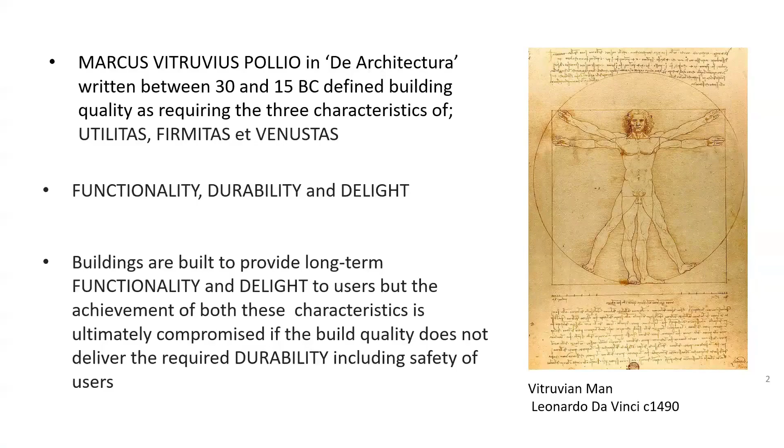Many of you will have heard of Vitruvius, who in the 1st century BC defined quality in architecture as requiring the three characteristics of utilitas, firmitas, et venustas, or functionality, durability, and delight. However, if what we build is not durable, users' buildings can only have limited availability of the functionality and delight that may be offered by a building. And additionally, user safety may be significantly compromised as a result of a lack of durability, which I will show in the following sections of this presentation.

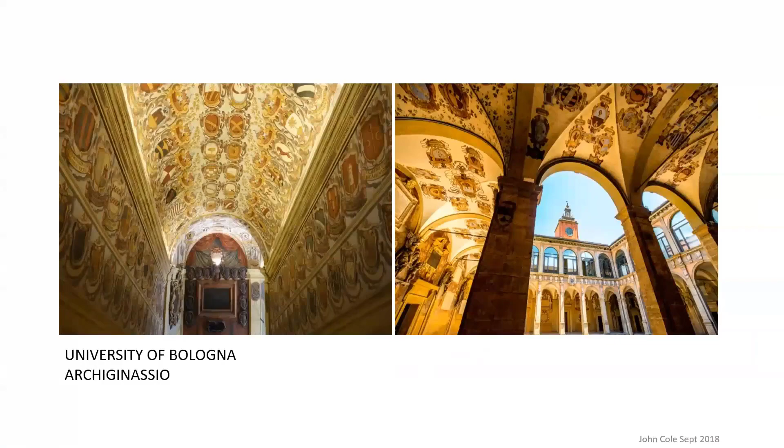As an introduction, I've taken university buildings as an example of a building typology, which has over many centuries provided some excellent examples where durability was built in as a result of using the best architects, the best designers, the best materials, and the best tradesmen. The durability with which, for example, the Archiginnasio in Bologna was built in 1563 is still enabling users of that wonderful building, part of the oldest university in Europe, to both benefit from its functionality and to delight in its beauty. It contains wonderful spaces maintained in first-class condition, and with the walls and ceilings of the corridors festooned with the coats of arms of students of the university who over the centuries came to Bologna University from all parts of Europe.

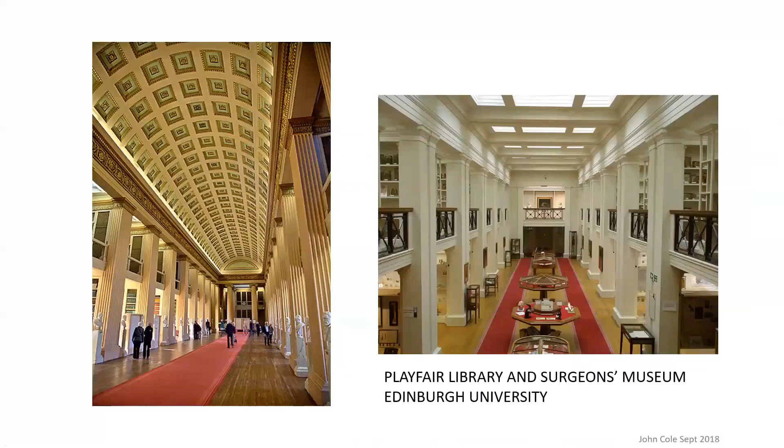And here the Old College, Edinburgh, from a design by Robert Adam, still serving thousands of students and attracting sightseers from around the world. A highly valued part of the heritage and fabric of the city, and still as durable as when it was built. The slightly later library and Surgeons Museum at this university in Edinburgh are wonderful pieces of interior architecture, still bringing immense pleasure to users.

And just for completeness, as we are based in Belfast today, two institutions north and south of the Irish border, Trinity College Dublin and Queen's University Belfast, provide high quality open spaces serving the communities that they sit in. Interestingly, both these were designed by the Northern Ireland architect Charles Lanyon.

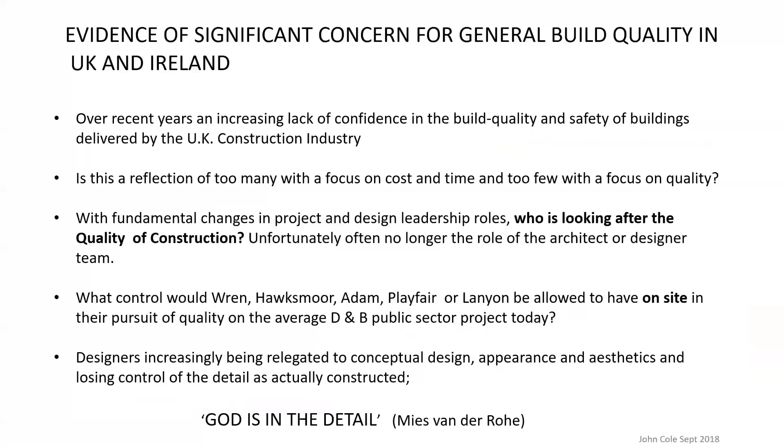Designers, unfortunately, appear to be increasingly relegated to conceptual design, appearance, and aesthetics, and they are losing control of the detail as actually constructed on site. It was Mies van der Rohe who said, "God is in the detail," and unfortunately, the design team seem to be getting separated from that.

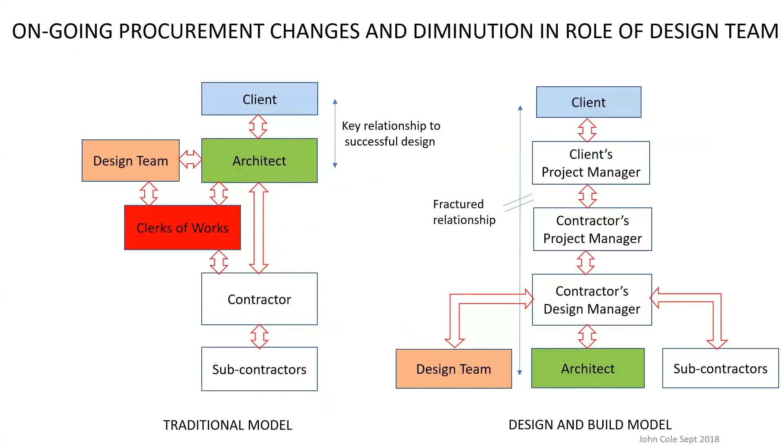Increasingly, the model on the right-hand side of this diagram tends to reflect the approach now being taken, which has created a significant distance between the client and the architect, particularly during the period on site. And the role of the clerk of works as a key advisor and the eyes and ears of the design team, has also been greatly reduced, so that we're relying more and more on contractors signing off their own work. And unfortunately, as is about to be shown, that is not proving to be successful.

The first of the inquiries I undertook followed the collapse in January 2016 at 8 o'clock in the morning of 9 tons of brick masonry onto a playground in an Edinburgh school. An hour later, a class of nursery children would have been queuing against this wall to go into the school.

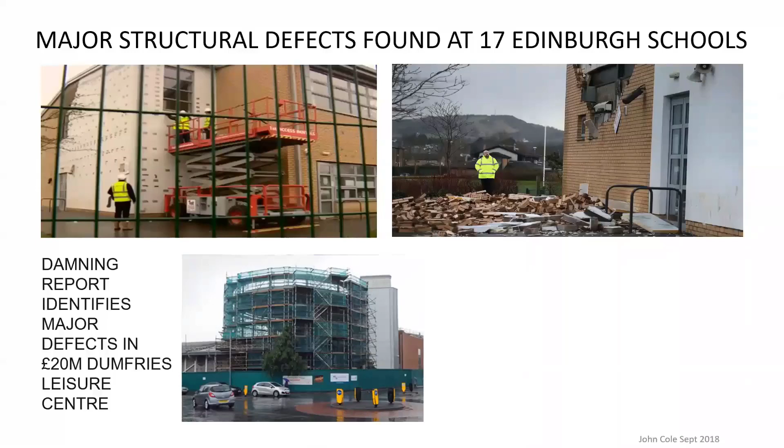The second inquiry was in relation to a major events and leisure centre in Dumfries, which had to be closed after only 6 years in operation, and recently looked like this, as opposed to what was originally built to look like, due to the fact that it had to be demolished as a result of the discovery of the same structural defects as found in the Edinburgh schools.

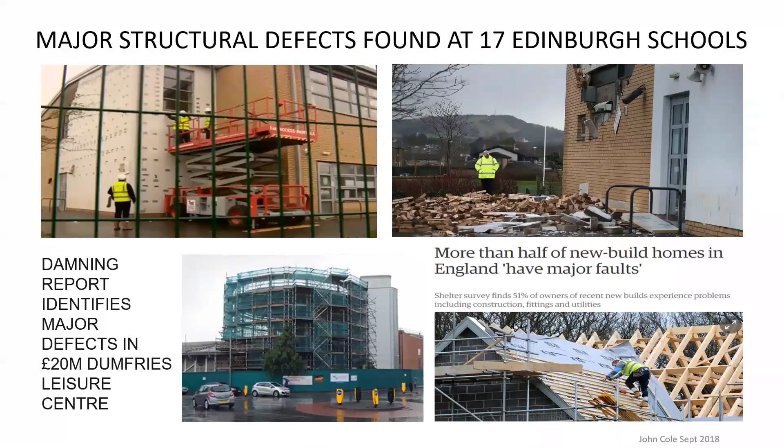But these problems are by no means confined to Scotland. Large national contractors were responsible for the buildings of both inquiries. This third headline reports the outcome of a survey by Shelter that suggests that more than half of new homes in England have major building faults.

The Edinburgh inquiry, which reported in February 2017, recommended that risk-based assessments of all buildings of a similar vintage and construction be undertaken to determine if the same defects were present. This BBC headline from April 2017 reports that almost immediately 72 schools were found to have the same range of defects in the construction of their external walls. Currently, I believe that number significantly exceeds 100 or 150 school buildings, with regular discoveries still being reported.

My inquiry report was clear that these masonry defects could not be viewed as a characteristic of only school buildings, but based on the evidence given to the inquiry, would likely be systemic within the industry. This quickly was proven to be the case, with large numbers of examples emerging in both public sectors, such as in the health sector, as shown by the headlines above, which refers to 51 health buildings in Scotland, and in private sector projects across Scotland.

In addition to the widespread failures in the masonry panels discovered in the Edinburgh schools, my inquiry identified widespread failures in the application of fire stopping throughout the 17 schools. Inadequacies in the incorporation of this life safety related factor have been known about for many years within the industry, and yet have been largely ignored, leaving the basis for fire protection of building occupants in many recently completed buildings majorly compromised.

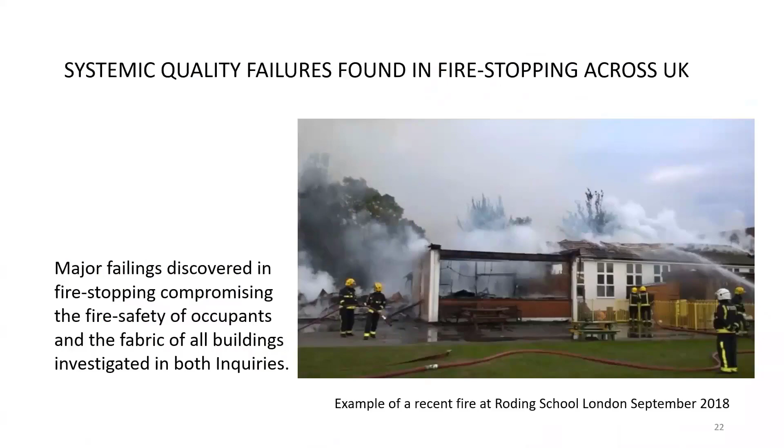Fires in school buildings are unfortunately too common. This fire in the picture here occurred just last month, but as we know, unfortunately, recently fires are not confined to one type of building. These headlines from major national newspapers over the last 2 years indicate the extent of this problem, which both sides of the industry have largely still failed to address. This headline refers to 8 schools in Manchester built under the Private Finance Initiative.

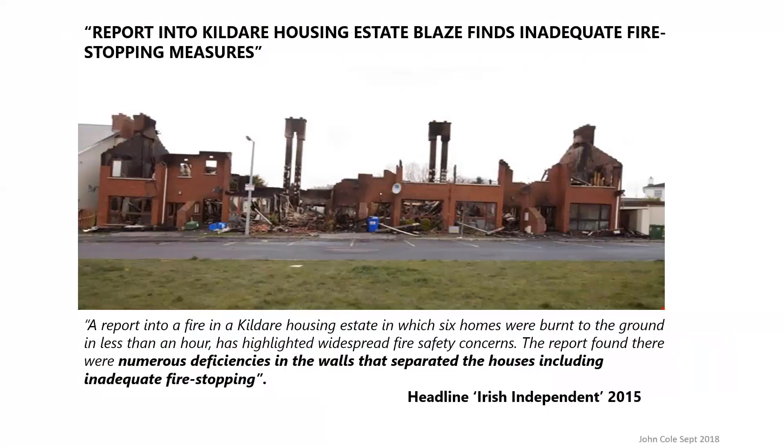This photograph shows the remains of a block of houses in Kildare, Ireland, which in 2015 were destroyed in less than an hour due to inadequate fire compartmentation between the houses and the roof spaces. Major failings have also been reported in fire compartmentation in many of the new hospitals recently built, requiring millions to be spent on retrofitting to provide a safe environment for patients. Again, all of these examples were built under PFI and used design and build procurement models.

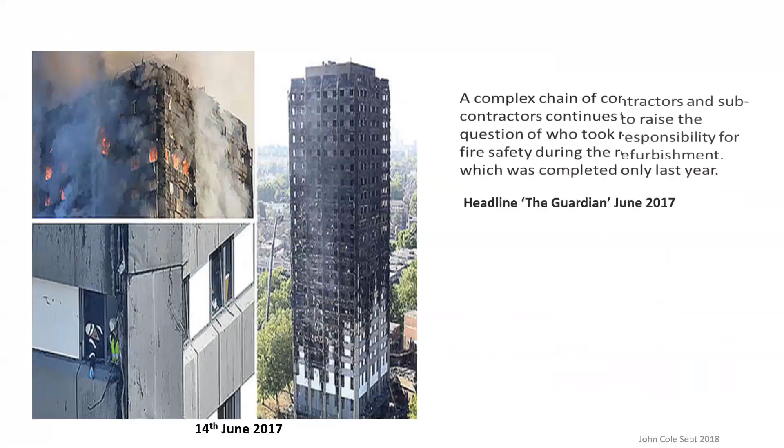And then in June 2017, this terrible tragedy occurred. It was procured using design and build. So the question again asked in our current procurement models: who, if anybody, is looking after the quality?

I will now look in more detail at one of the two principal building failures identified in the Edinburgh Schools inquiry, defective masonry construction. If any of us thought that this was a problem only for mainland UK, then headlines only yesterday in the main Irish newspapers would have brought a greater realisation of the likelihood that the systemic nature of these failings also affects the island of Ireland.

Both fire safety and structural defects were apparently identified in a significant number of schools recently built in Ireland. Initial reports indicate that the structural defects relate to the lack of adequate wall ties and the fixing of masonry panels back to the structural frame. This would be virtually a repetition of the defects discovered as part of the Edinburgh Schools inquiry in 2016. One technical report suggested an 80% risk of wall collapse in storm winds in a North Dublin school.

The Edinburgh inquiry itself was completed. The report I completed in February 2017 was published, and it is available on the internet for those of you who wish to refer to it. Just to give a background to the events leading to the inquiry, in January 2016, gable walls collapsed at Oxgangs primary school during a period of high winds. The initial inspections considered it as a one-off event, probably due to lack of embedment of wall ties.

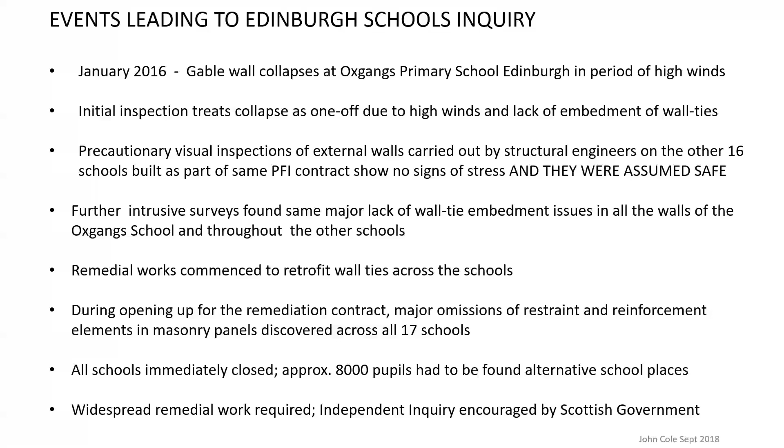During opening up for this remediation contract, major omissions of restraint and reinforcement elements in masonry panels were discovered across all 17 schools, raising more serious questions about the structural integrity of the buildings. All of these schools were immediately closed, and over a weekend, approximately 8,000 pupils had to be found alternative accommodation in schools around Edinburgh. Widespread remedial work was required, and an independent inquiry was encouraged by the Scottish Government.

In May, the City of Edinburgh Council agreed to commission an inquiry and asked me to chair that inquiry. I in turn appointed Stuart McCartney, a structural engineer, and Chris Phillips, a solicitor, to sit on the inquiry panel with myself. The report, as I've said before, was published in February 2017 with 40 recommendations. Some of these have already been implemented by the Scottish Government, and all the public bodies in Scotland have been required to report as to how they are addressing all of the recommendations.

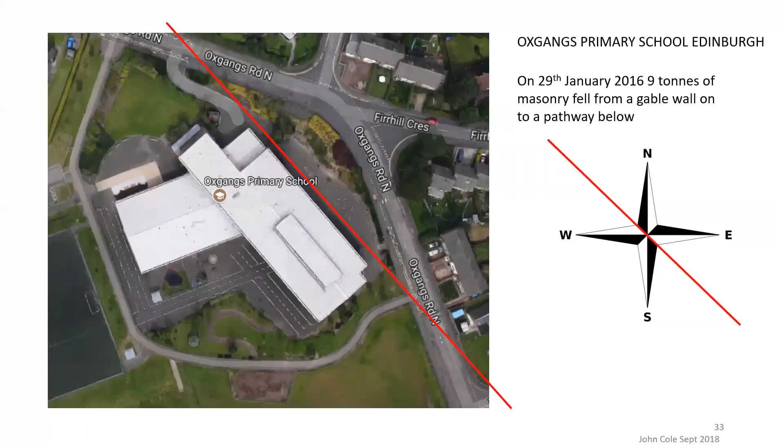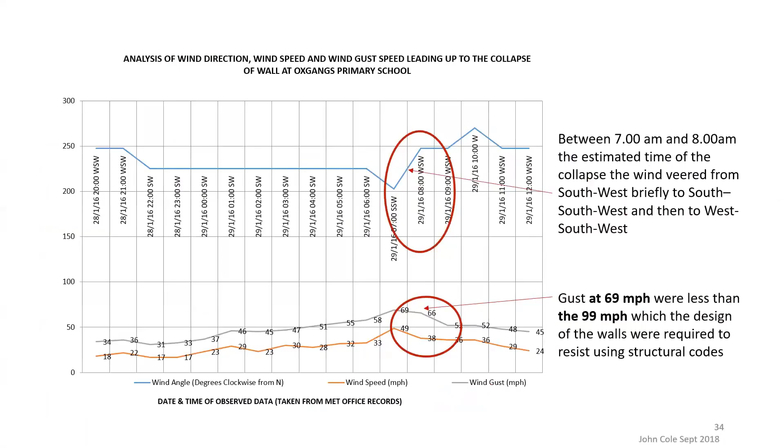I'll now go into some of the detail of the collapse. On the 29th of January, as I said before, 9 tons of masonry fell onto the pathway below. This photograph shows the layout and orientation of the school. As you'll see from this chart, the top layer shows the direction of the wind during the storm, and you'll see just around 8 o'clock the wind veered from southwest briefly to south-southwest and then again to west-southwest. At the same time, it gusted up to a speed of 69 miles per hour, still well within the 99 miles per hour which the design code required the wall to be able to resist.

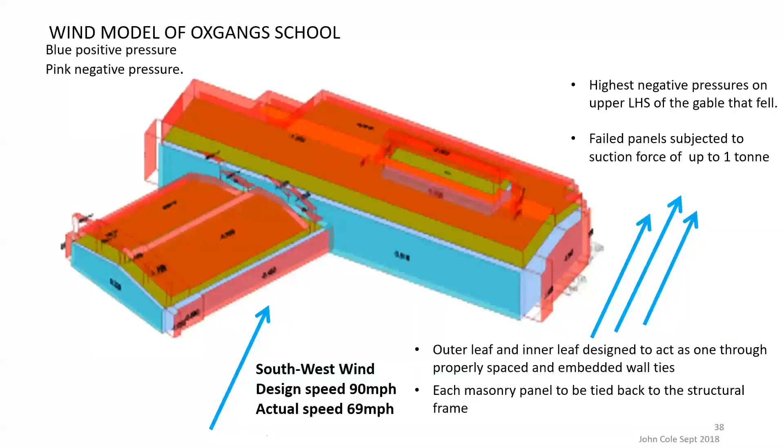So you can see the wind changing direction, and as it veers in this direction, it leads to suction on that gable wall, and the gable wall collapses onto the area immediately outside. This diagram shows the pattern of the suction on that wall, and the failed panels on the left-hand side of the gable on the right were subjected to a suction force of up to 1 ton. The outer leaf and inner leaf were, of course, designed to act as one through the inclusion of properly spaced and embedded wall ties. And again, each of these wall panels was supposed to be tied back to the steel structural frame. In both cases, this failed to happen, and this was basically the reason for the collapse of the wall.

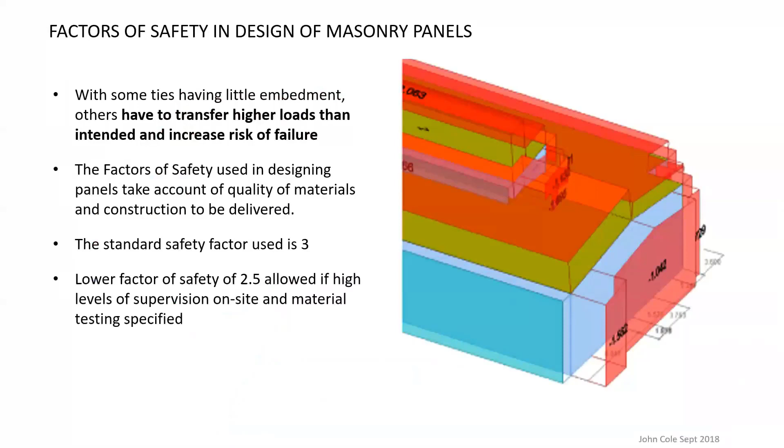Under the codes, there are different factors of safety allowed. The standard factor of safety required is 3, but that can be lowered to 2.5 if there is assurance as to a high level of supervision on site and rigorous material testing specified. The reduced safety factor was actually used by the designers of the building, and calculations undertaken by 2 firms of independent structural engineers showed that with the lower factor, these buildings would just pass, but if the standard factor of 3 had been used, they would actually have failed.

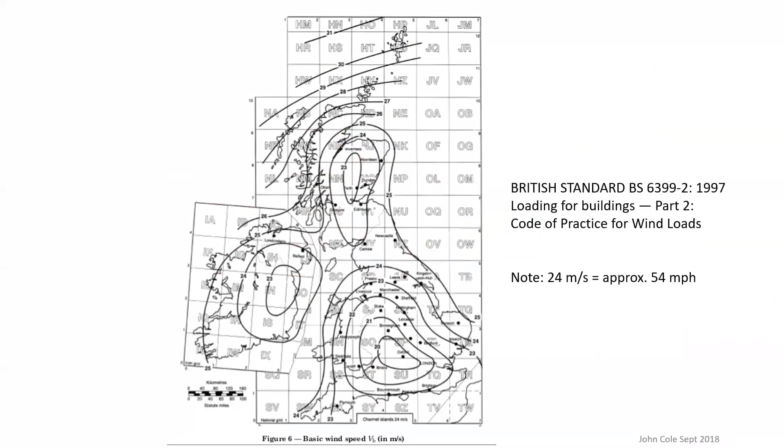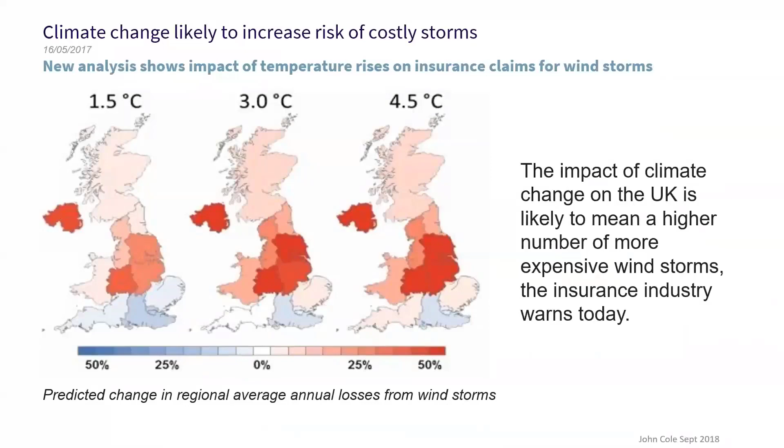The specification for the school in Edinburgh was pretty standard. It was a cavity wall with an internal block leaf of 140 mil, 120 cavity with a 70 mil insulation clipped to the inner leaf, and an outer face of brickwork or rendered blockwork. The wall ties specified were heavy duty 250 millimeter length Vista type wall ties, each required to have a minimum embedment of 50 mil, although if you read the manufacturer's instructions, they recommend a minimum embedment of 65.

Bed joint reinforcement was specified widely throughout the school buildings because of the size of panels involved and was required to give the structural stability needed. On the right hand side, the head restraints specified were a type with a sliding anchor, tying the wall in 2 places on the outside leaf and tying back to the inner leaf, all tied back to the structural frame.

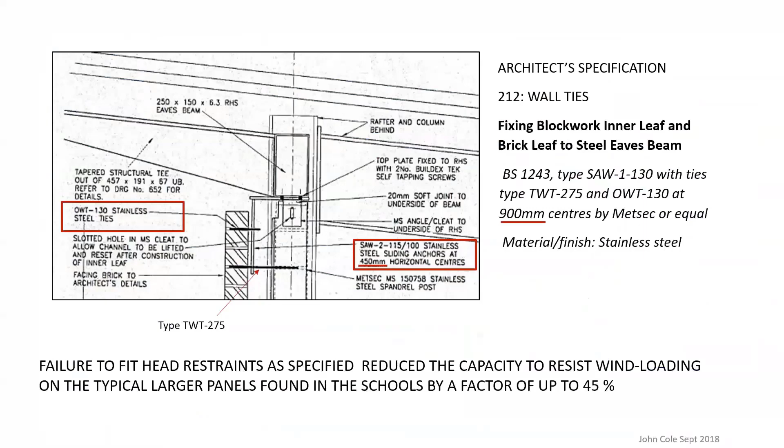This diagram actually shows something we found, that there was a differentiation between the architect specification, which showed that those head restraints should be fitted at 900 centres, whereas the engineering drawing showed 450. In fact, we find that they weren't fitted in most cases at all. Failure to fit the head restraints will actually lead to a reduction in the strength of the wall of up to 45%.

The other issue which came to the fore was that we were advised that the inner leaf of the wall was built first completely, and then the outer leaf was brought up afterwards. This is used to create a dry environment for trades to move in earlier than they would otherwise be able to do so. However, this was in conflict with the recommendations and the specifications, which required that the 2 leaves be brought up together with the leveling of courses. This was in fact pointed out by architects to the contractor for whom they were working, and was largely ignored.

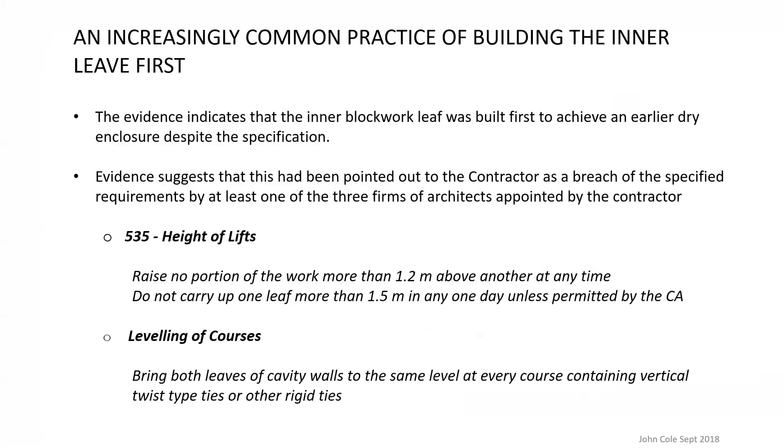There are many problems associated with building the inner leaf first, particularly in that you're relying on the grip and suction of the mortar to hold ties in place if you don't have an outer leaf on which to also rest the tie. As a result, bricklayers push the ties further into the inner leaf, leaving insufficient depth in the ties to give adequate embedment in the outer leaf. Alternatively, they may push the ties into the wet joints after building the brickwork. This simply causes a void and doesn't give the traction required on the wall ties.

Also, the inner leaf is generally built by people with less skills, as it is blockwork rather than the brickwork on the outside. And if it's built off the plumb, perhaps to follow the line of stanchions, then the outer leaf being built to plumb means that there's variation in the cavity width.

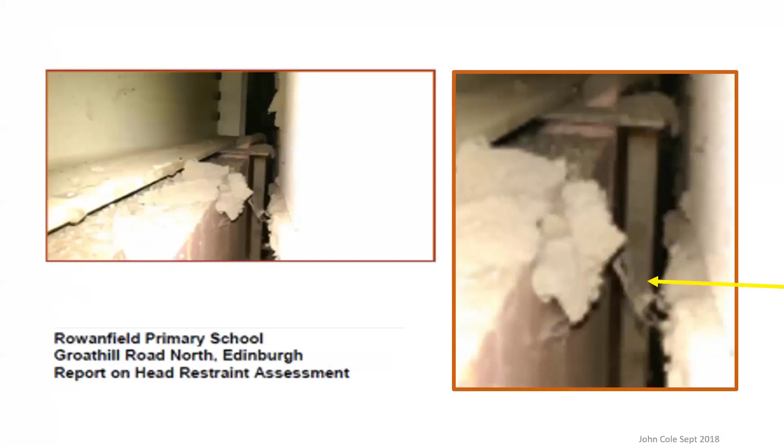This photograph shows one of the head restraints built into the cavity of the wall and being attached to a steel beam. But as you see in the close-up here, the wall ties, which are supposed to be on the sliding anchor, connecting the anchor to the inner and outer walls, have not been built in properly and are just hanging from the tie, so they're not fulfilling their purpose at all.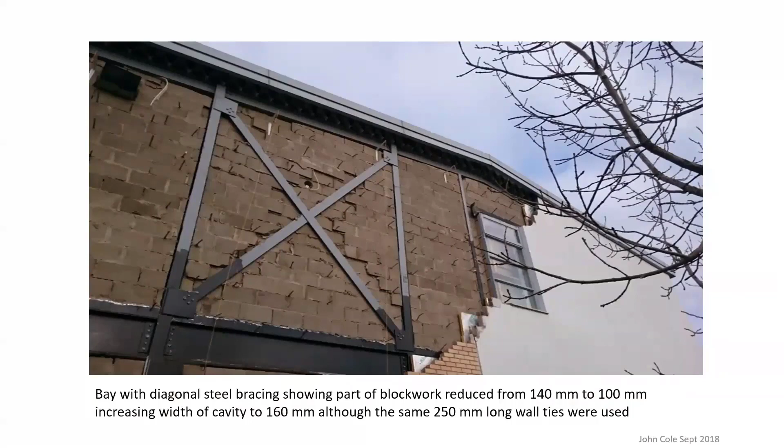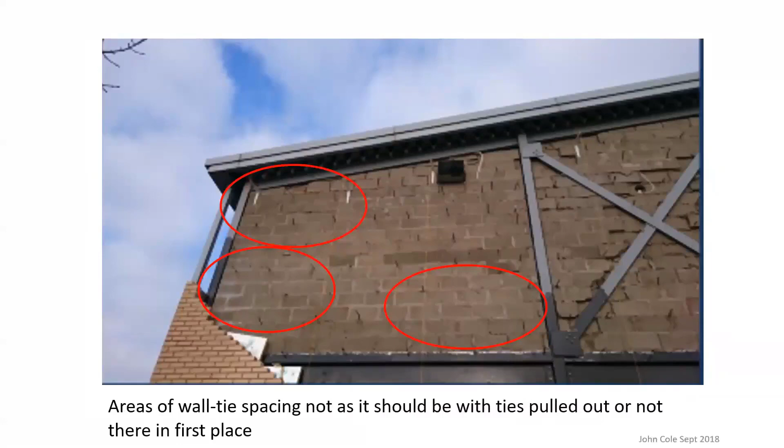However, in the adjacent bays, you can see that the ties were again over. The embedment was too much in the inner leaf, leaving little short areas standing out to connect onto the outer leaf when it was being built up later, and also areas where no ties were obvious at all. These are internal pictures of the walls of that school, and you can see the end of the tie just touching the inside or outer face in both these cases.

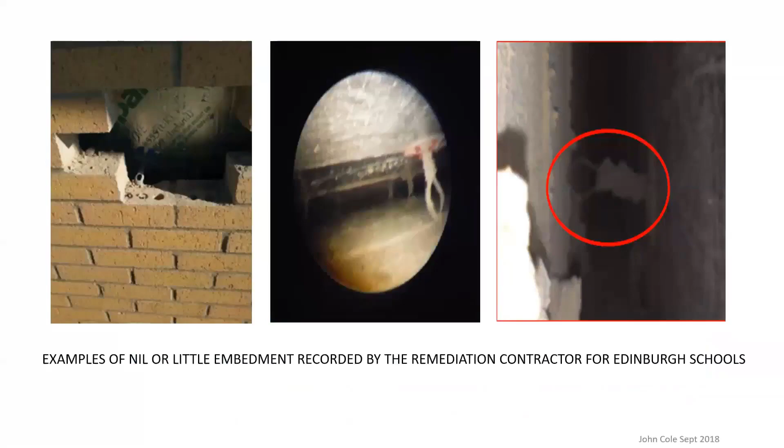And here's a different school in the same block of 17 schools, again using a slightly different wall tie, but again failing to reach the outer leaf or the inner leaf. And again, the same issue in different schools in the group. Virtually no effective embedment of wall ties into the outer leaf.

I'm going to very, very quickly go back to Vitruvius, who I mentioned at the start in relation to durability, in which he's comparing the work of Romans and his own workmen and Greeks. And the first one, he says, our workmen, in their hurry to finish, devote themselves only to the facing of the walls, setting them upright, but filling the space between with a lot of broken stones and mortar thrown in anyhow. This is 100 years BC.

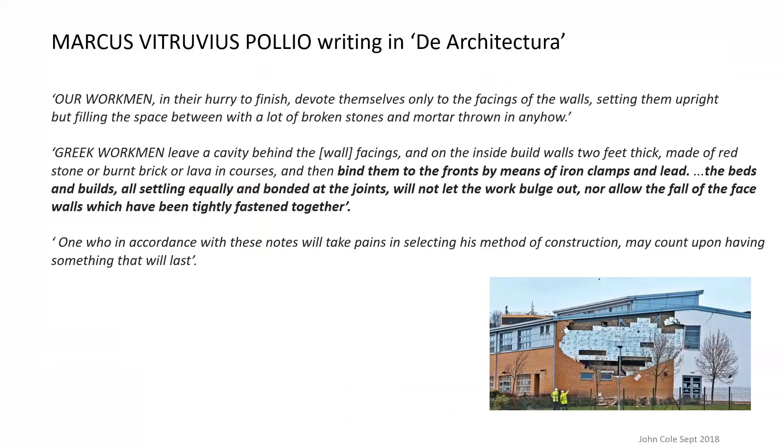He contrasts that with the Greek workmen who he had seen. They leave a cavity between the 2 walls and bind them to the fronts by means of iron clamps and lead. The beds and builds, all settled equally and bonded at the joints, will not let the work bulge out, nor allow the fall of the face walls, which have been tightly fastened together. One who, in accordance with these notes, will take pains in selecting his method of construction may count upon having something that will last.

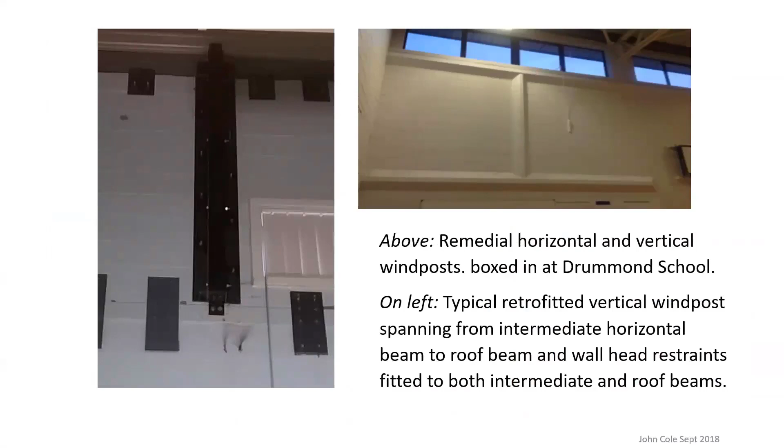It would appear that large parts of our construction industry in the 21st century seem to have forgotten this basic 1st century BC lesson. You can see here the retrofitted wind posts, both horizontal wind posts and vertical wind posts, and restraint plates tying the internal walls to the beams, intermediate beams, and the top beams to provide the required structural integrity. And you can see the impact that had on the building.

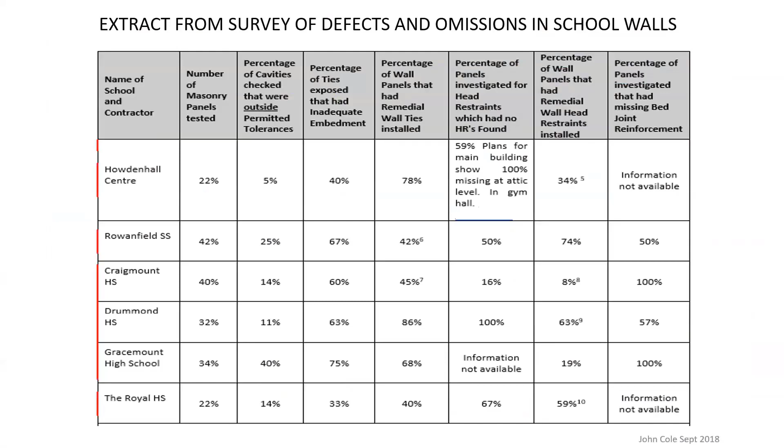I'm not going to go through this diagram in detail, other than to say that on the left-hand side you see just 6 of the 17 schools, and this records the amount of areas which had no bed joint reinforcement, which lacked head restraints, and which had inadequate embedment of wall ties or missing wall ties. And you'll see the numbers are all 60, 70, 80, 100%. This demonstrates major failing of quality across all of those aspects, across all of the schools.

So the issue really is about the quality assurance that we get from the industry. As I said before, we had 6 different contractors building 17 schools, each with an approved quality assurance system. The subcontractors used had similarly approved quality assurance systems. The firms of architects and the firm of structural engineers used in all projects had QA systems, as had the national firms who acted as independent testers. And additional to that, building control inspections were carried out.

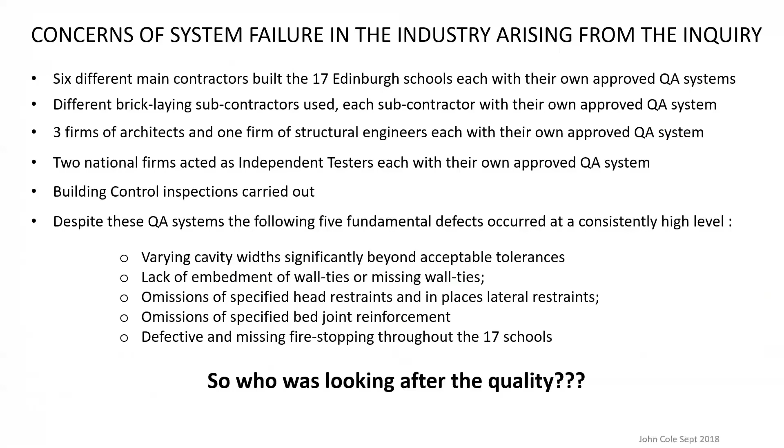Despite all of these quality assurance systems, which were paper-based, the following fundamental defects occurred at a consistently high level throughout all of the buildings: cavity width, lack of embedment, missing wall ties, missing head restraints, missing bed joint reinforcement, defective fire stopping, and missing fire stopping throughout the schools. So again, who was looking after the quality despite all of these quality assurance processes and systems?

The inquiry sought information from all Scottish local authorities, in addition to Edinburgh, and found that the same defects had been present in many schools from across all parts of Scotland. In the previous 4 years, there had been at least 5 collapses of external brick panels in recently built Scottish schools, the causes being virtually identical to that found in the incident in Edinburgh. There was no effective coordination of these issues as an industry-wide problem.

In February 2017, I concluded that similar defects were likely to be spread throughout the industry and recommended proactive risk-assessed investigations should be undertaken, and hundreds of buildings have subsequently been identified with those defects. As a result of this inquiry, I also found that clients should not rely solely on quality assurance processes of contractors and must provide for their own independent expert scrutiny.

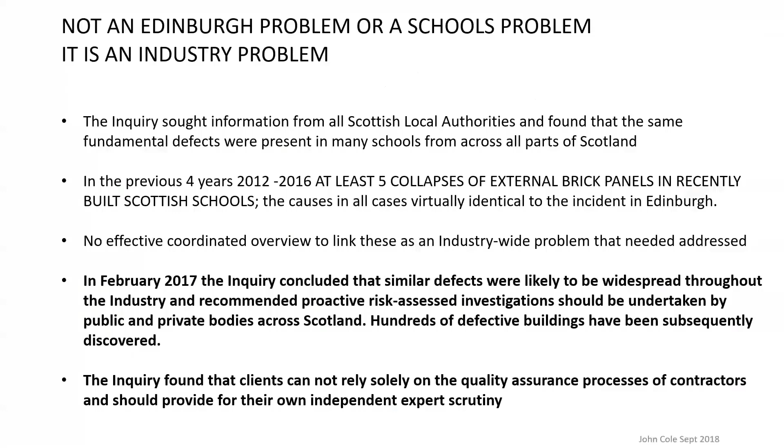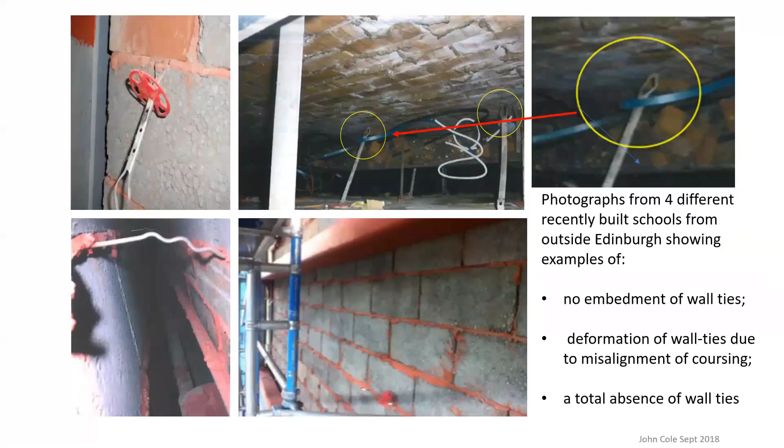These photographs show 4 different examples of schools built outside Edinburgh, showing exactly the same failures in relation to no embedment of wall ties, deformation of wall ties, and a total absence of wall ties, one wall in a gymnasium.

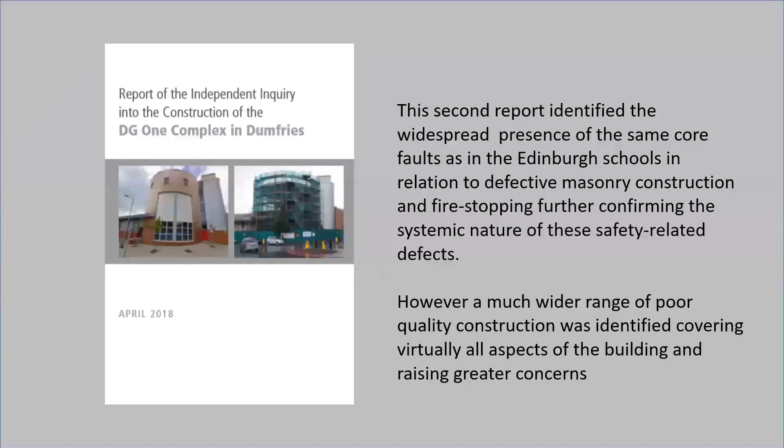The second inquiry is in relation to major defects, including those in the Edinburgh schools, but a much wider range of defects that were found in a large event and leisure centre complex in Dumfries, in which I was also asked to chair the inquiry, and this reported in April 2018. Again, this report is available on the internet.

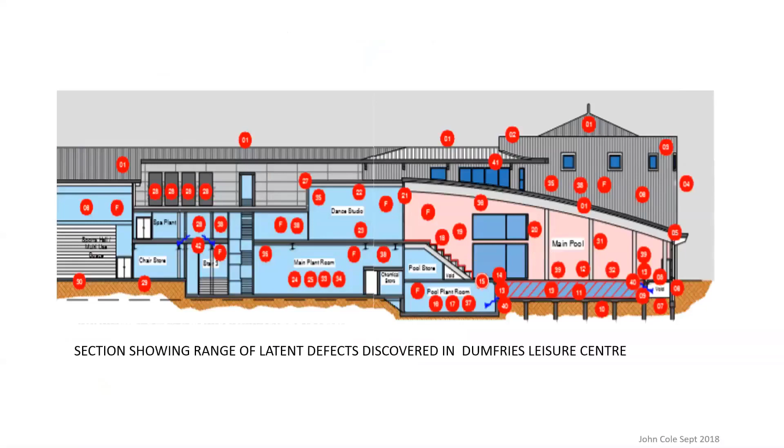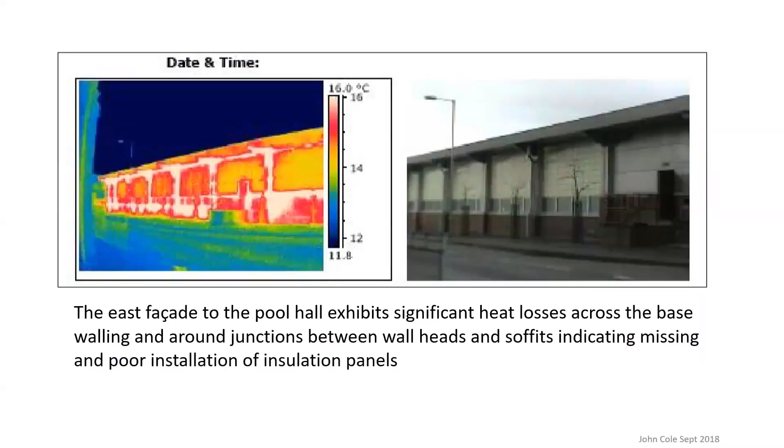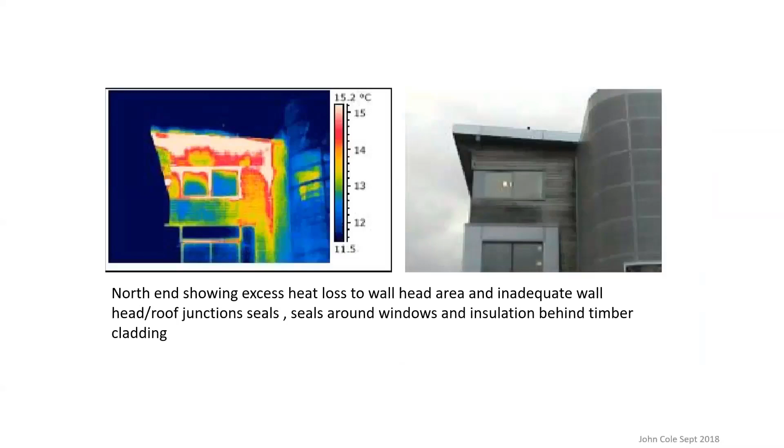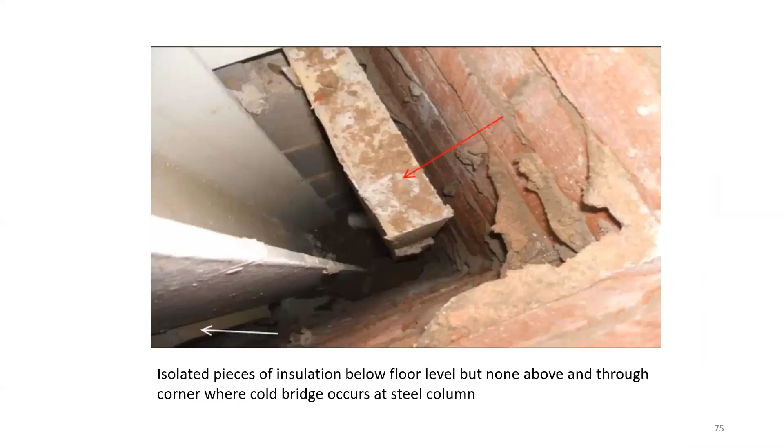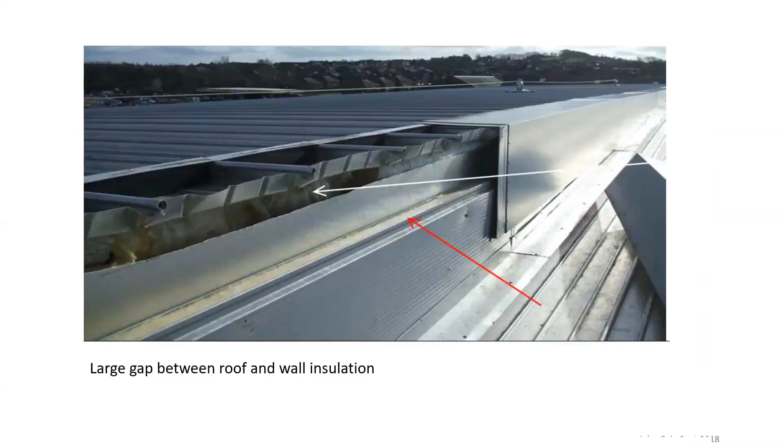Again, insulation missing within the wall, and a major gap here between the insulation and the roof and the wall, leading to again an area where the warm air just escapes from the building. This is the edge of the building, as you can see inside, the insulation just stopping short. This just shows the inability to achieve, by a factor of about 10, the specified energy effectiveness of the fabric.

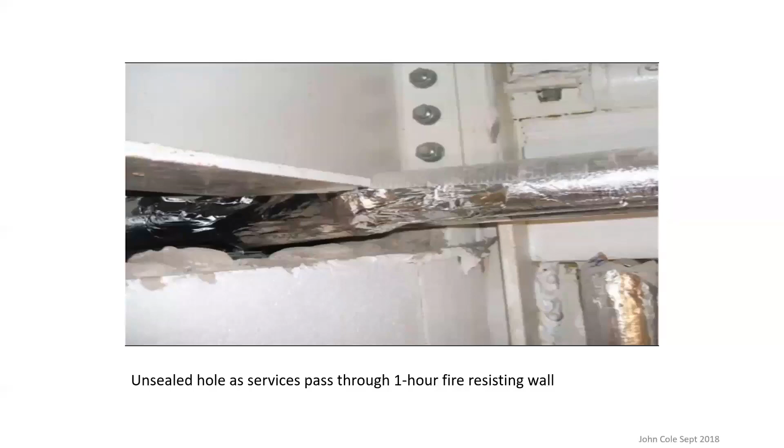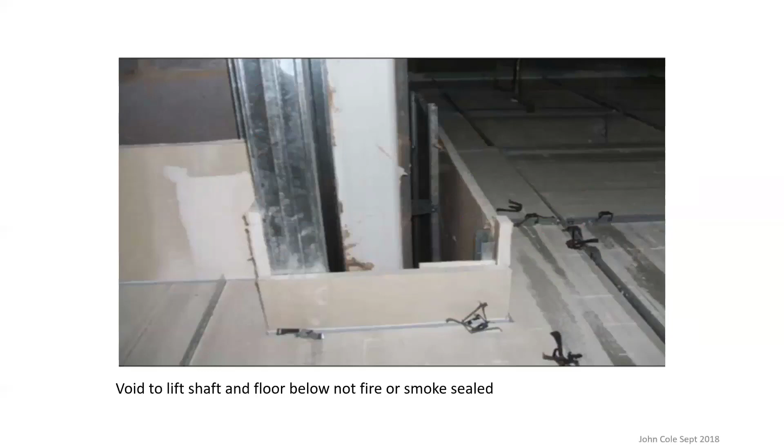These photographs show fire stopping, which is of primary interest largely because of the Grenfell incident. And you can see major holes in firewalls. This is a fire resisting wall on the left with a huge gap that the service has just passed through and hasn't been fire stopped. And this was found to be throughout the building, throughout the floors of the building, at all the voids, wherever the services passed through, again, where beams passed through.

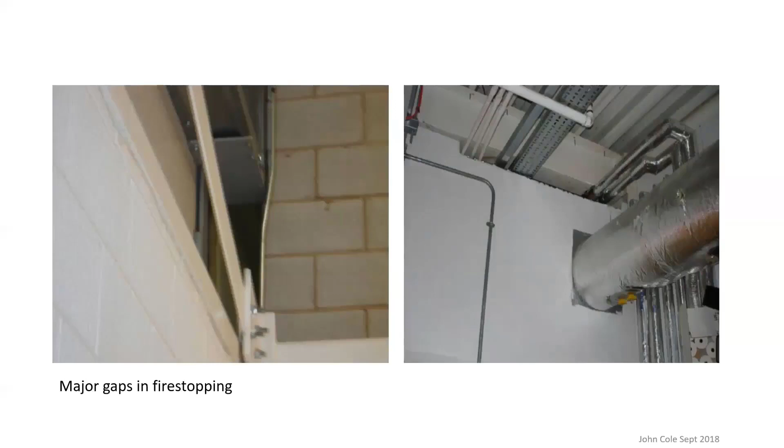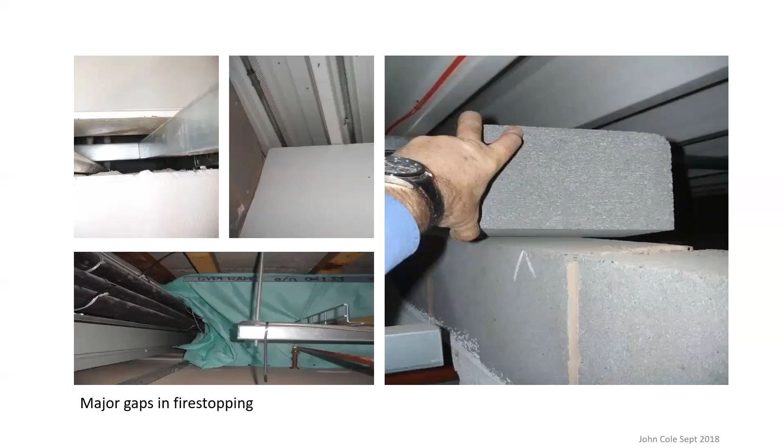Again, no smoke seals, no attempt to seal. And yet this building was open for 3 years before it was recognised these major safety compromises existed within the building, and the building had large audiences of 1,000 at a time. This particular example on the right hand here, you can see a firewall where the one block was just left sitting on the wall, it wasn't even completed. And this had passed inspection by the quality assurance processes provided to the client by all of these contractors.

Internally in the building, virtually every piece of metal and structural steelwork as well, which is supposed to be protected, was found to be corroded, largely in these instances by using the wrong grade of steel in an environment which has chlorine in it. So this is only after 6 years of use in the building.

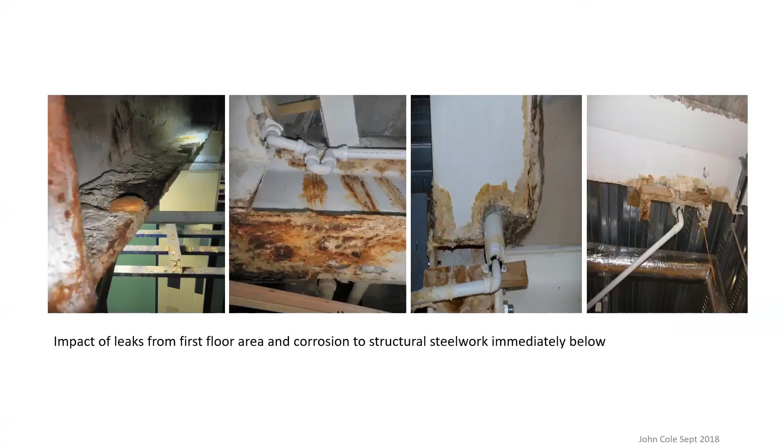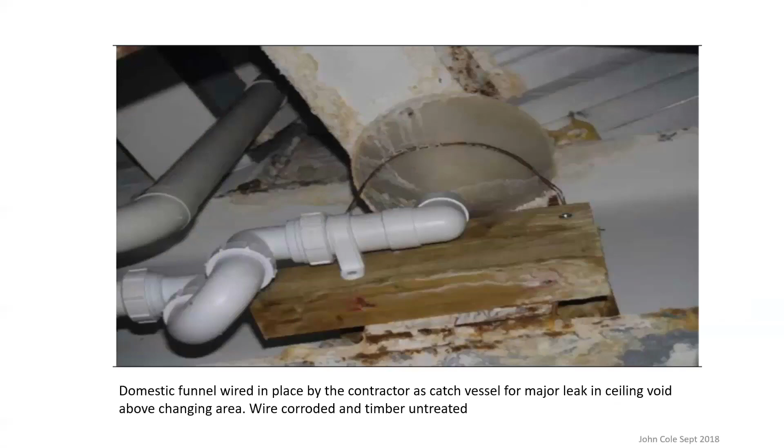These horrific photographs of the interior as a result of leaking pools onto the structure of the building. This was supposed to be a temporary solution, but remained a permanent solution as to how the contractor dealt with a leak from an upstairs spa area. Instead of fixing the leak, he put in a funnel underneath it and ran it into the drain systems. The leak just continues. But as you see, even the funnel wasn't effectively fitted, with the damage completely around it.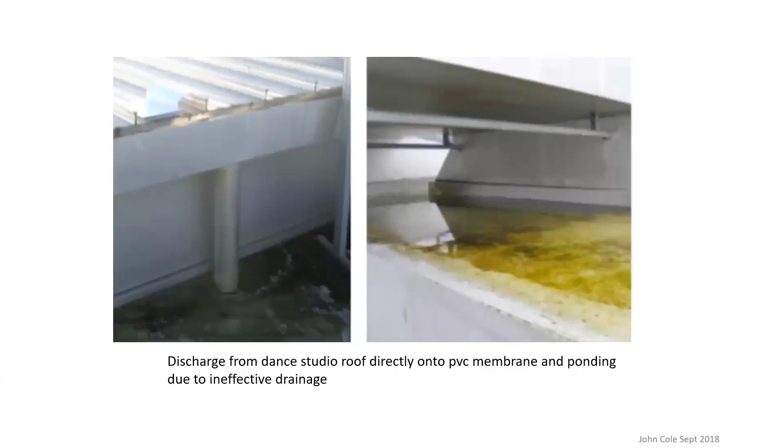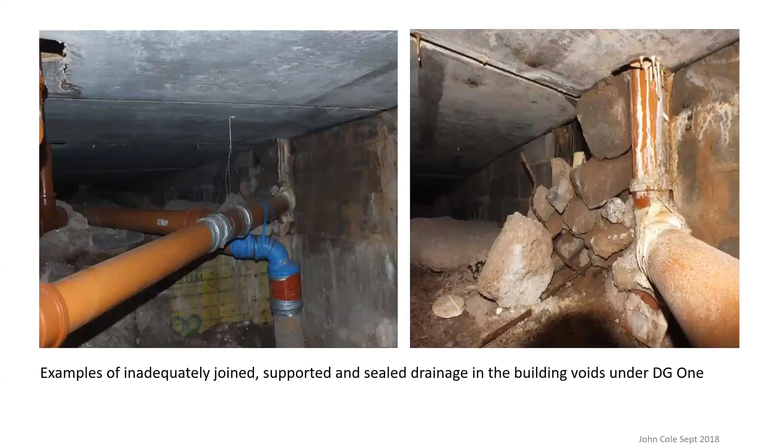Drainage. The drainage in the roof was totally inadequate. Badly laid out, the falls were in the wrong direction. And in the underground drainage, you could find that the drainage immediately under the floor was packed up on bits of stone or actually held in place by wire and taped joints. Now, this building was built by an international large contractor still carrying out major work across the UK.

The walls, to go back to the same issue as was raised initially in the Edinburgh schools and has just raised its head in Dublin. These before and after photographs are normally shown the other way around. So the after is when we came to site, where the building actually had to be knocked down to be rebuilt.

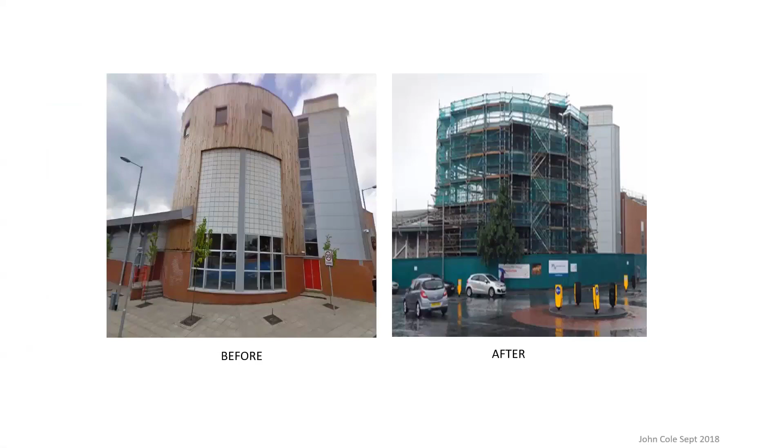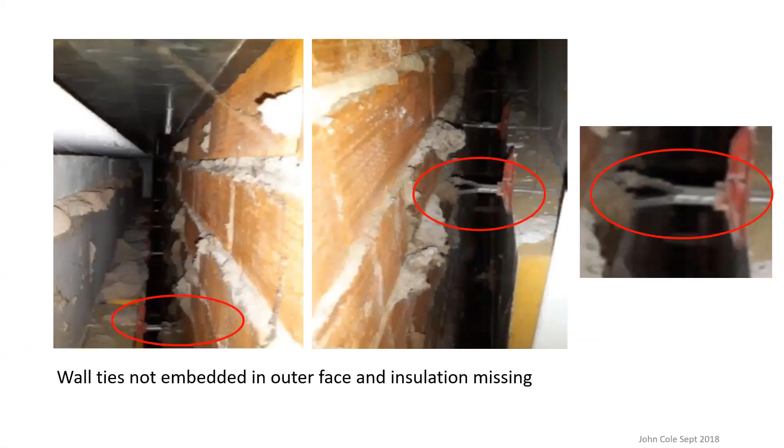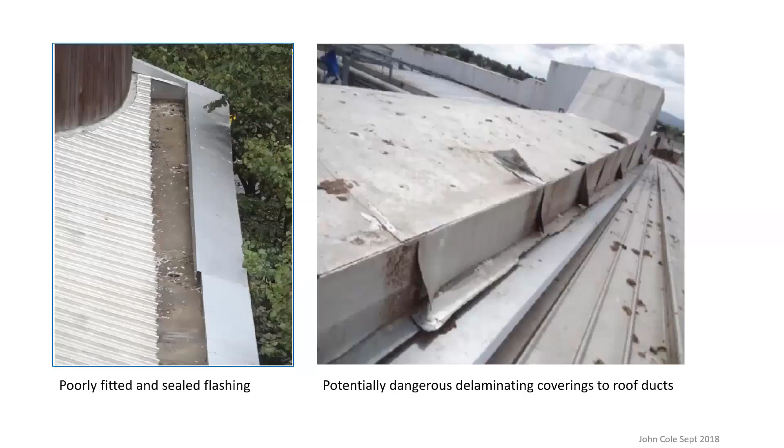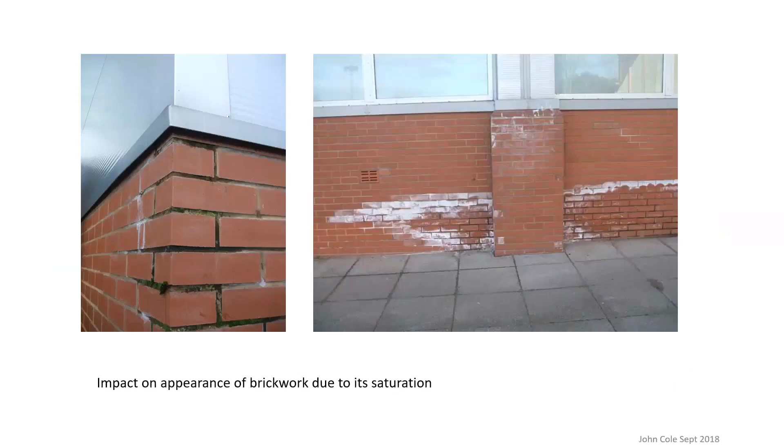And again, just to show the state of the building after 6 years, this is the roof. You can see the misalignment of elements, corrosion of the plant fittings on the roof, the air handling units, the exterior cladding, the brickwork, sills, other fittings. Right. And again, in the pool, there were 3 swimming pools in this building. The tiles were failing left, right, and centre throughout the building. All had to be removed. The walls had to be reconstructed and tiling replaced as part of an ongoing project to fix it.

What did the client feel they were getting in this building? Well, they felt they had a major national contractor. The contractor and subcontractors had submitted tender documents which provided massive amounts of quality assurance processes and certificates identifying them as a quality assured organisation. They thought they were getting regular inspections of work by members of the design team who were, of course, working with the contractor. While these were specified in the scope of the services set by the contractor and in collateral warranties provided to the council, they did not happen with the frequency specified.

Design and build had been chosen by the council as more likely to achieve tight cost and time objectives. Again, quality as an original driver of the project was quite forgotten. Council officers relied on being able to seek reimbursement through the contract if things went wrong. I don't think they envisaged that they might have to close the building for what would be a period of 5 years by the time it reopens.

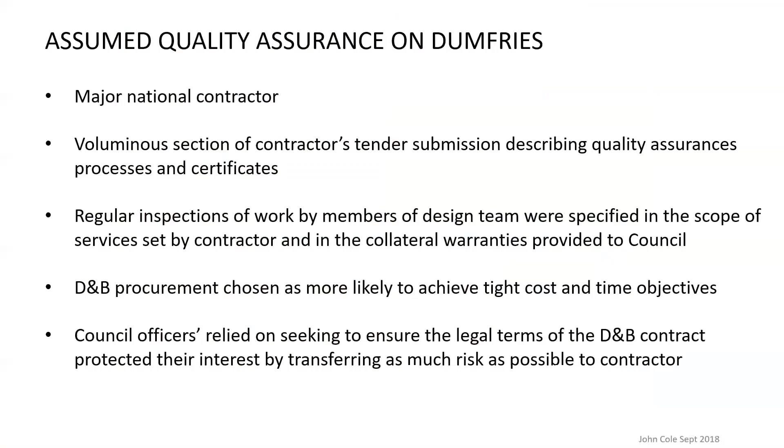The compromises on the design and build contract that contributed to quality failures in Edinburgh and Dumfries was failure to fully integrate and coordinate the design before construction started. There's failure to ensure that the design would actually comply with building regulations. There's virtually no independent scrutiny of construction on behalf of the client by properly resourced clerk of works and resident architects or engineers. The design team members appointed by the contractor had no authority to instruct them to redo non-compliant work, and snagging by that team was discouraged or even excluded.

There was failure to have professional sign-off of changes to the design or substitution which happened during the course of the project by the main and subcontractors prior to the implementation on site. And most importantly, in my mind, there was no direct relationship between the client and the design team with regard to assurances that the quality of construction being carried out was in accordance with the design they produced.

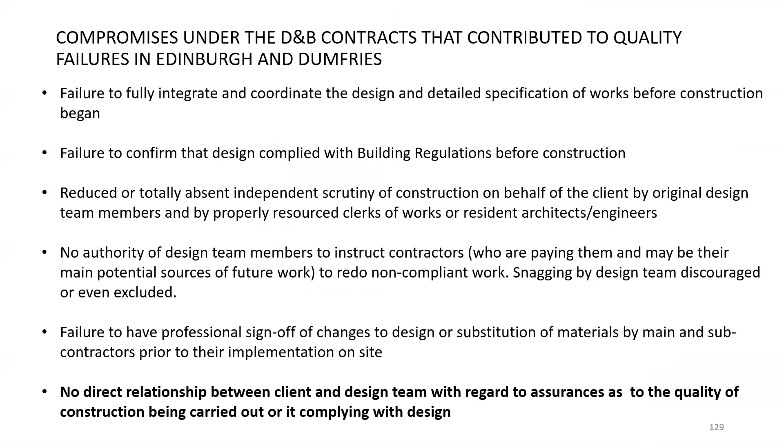Design teams, as I said before, are increasingly being marginalised to pre-construction office-based activities. The golden thread between the original design and implementation of that design on site has become severed. Professional knowledge is increasingly absent from decision-making on site. There's little point in having approved sets of building drawings if there's no assurance that what is actually designed is built. Designers are frequently unable to ensure that their underlying design intent is being delivered, particularly in relation to structure. And the number of visits by building control inspectors are totally inadequate to provide the sort of quality assurance that clients actually require.

Design teams, unfortunately, are cutting back on the production of documentation, with more design being delegated to subcontractors. Site visits are reduced, leading to a gradual de-skilling of our professions, particularly among younger members who will not have the same familiarity with the practicalities of building on site and the use of materials. There's a significant reduction in the use of clerk of works, who are less and less obvious and much more difficult now to find. Contractors are increasingly determining the level of services provided by the design team, including their level of inspections on site. And design team members are often contractually prevented from reporting directly to the client and potentially being overruled by site managers who have inevitably conflicts of interest.

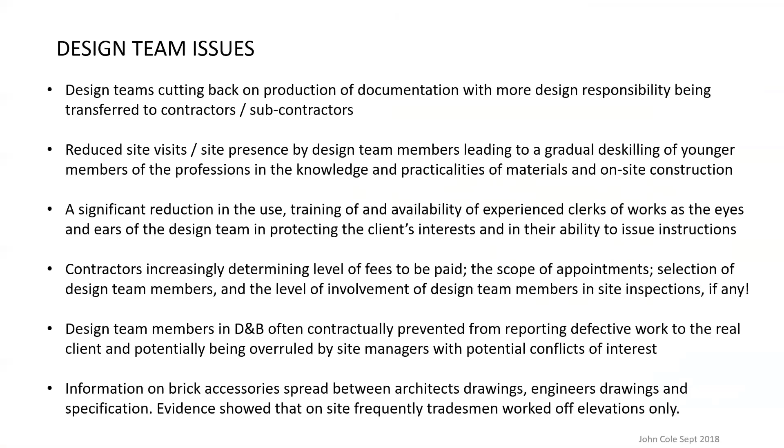The other problem with the industry is that architects and engineers don't necessarily fully coordinate their drawings. And if one thinks about the bricklayer working on site, he can't have 3 or 4 drawings looking at the same time. And evidence shows that they frequently work off elevations only, so they're probably not aware quite often of head restraints, other restraints, bed joint reinforcement requirements. We need to make it easier for our contractors on site.

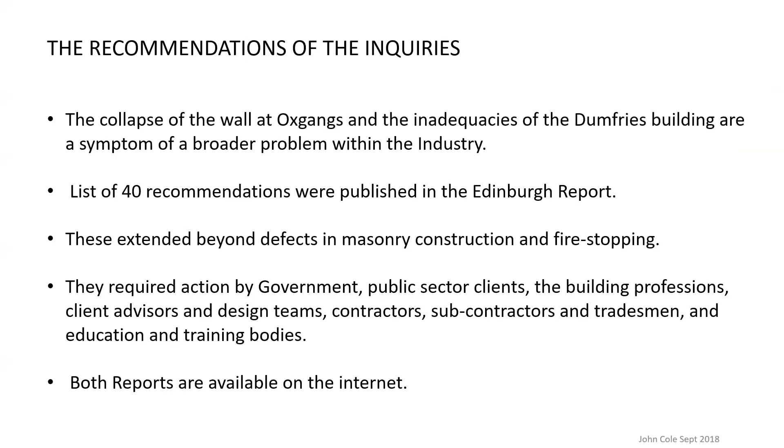The inquiries had a wide range of recommendations, and these required actions right down from government all the way down to the individual workers, going through the professions, design teams, contractors, subcontractors, and manufacturers. And many of these recommendations, I say, are currently being implemented. I've already, I think, covered that slide, that there's a series of ministerial summits on, including the client bodies who are seeking a planned program of initiatives aimed at improving quality.

The contractor issues: a culture that is often focused on cost and time to the detriment of quality. Quite often, the main contractors and managerial staff have less knowledge of actual building trades, more coming from a management background. Insufficient supervisory staff on site, the lack of training of young apprenticeships in the building trades, more trades being employed as self-contractors moving quickly from project to project, the squeezing of subcontractors for lower prices, which results in lower quality, the widespread evidence that paper-based quality assurance systems are quite often a box-ticking exercise in offices rather than a site observation-based quality inspection. Design teams are no longer snagging, and the conflict of interest in removing defective work.

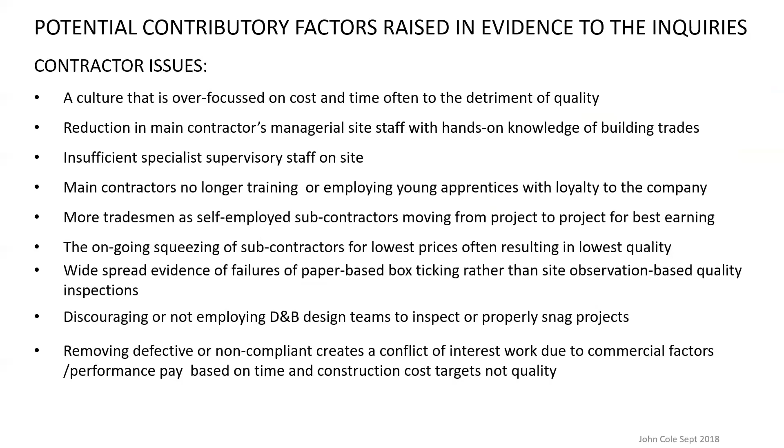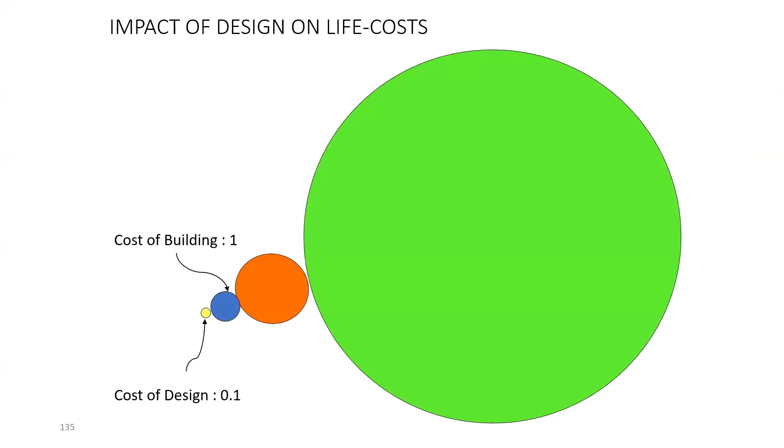This is a diagram that I use quite often when speaking to groups. And really what I'm saying is that disinvesting in that initial small yellow circle, which is the design team input and the quality processes to protect the client's interests, can lead to larger and larger circles. And the cost in use to a client can be 50 to 200 times the capital cost of the building, which is reflected in the blue circle, the cost of the building.

Quite often, design and build contractors are only interested in reducing the yellow and blue circles, whereas clients should be totally interested in the cost of maintaining their buildings, which is the 5, and the 50 to 200, which is the operational cost of the building over its life. And yet, all of the cuts made in that little yellow dot, and making it subservient to the blue dot, is likely to lead to much larger costs in the life cycle of a building to clients and to their detriment.

So, concluding thoughts. There's a need for a changing culture within our industry to improve the focus on quality, and I think that Grenfell has really brought that to the fore. The original role of the architect and design team in protecting the quality of construction for the client is no longer the norm. This role needs to be restored, or an equivalent role.

There needs to be an appreciation of the value to society of buildings over the long term, and an understanding of the potential tragic consequences, such as Grenfell, of substandard construction. A focus on greater efficiency in delivering the required quality rather than on cutting quality to achieve reduced cost, and the misuse of value engineering processes.

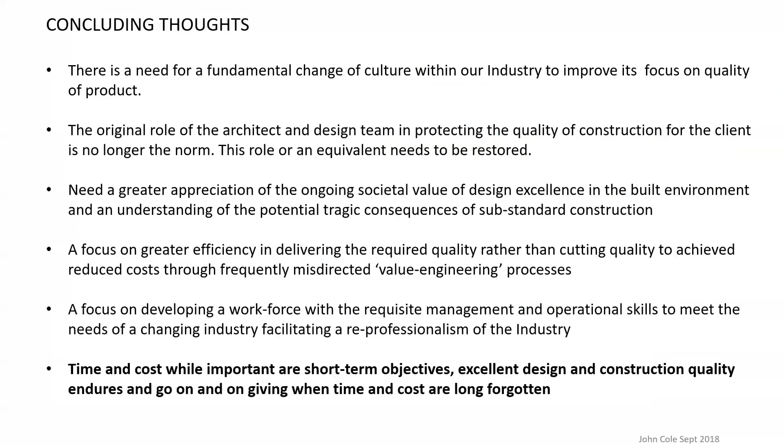A focus on developing a workforce which has the skills managerially and operationally at a trade level to meet the needs of a changing industry. We need to re-professionalize our industry. Time and cost, while important, are short-term objectives. Excellent design and construction quality endures and goes on giving when time and cost are long forgotten.

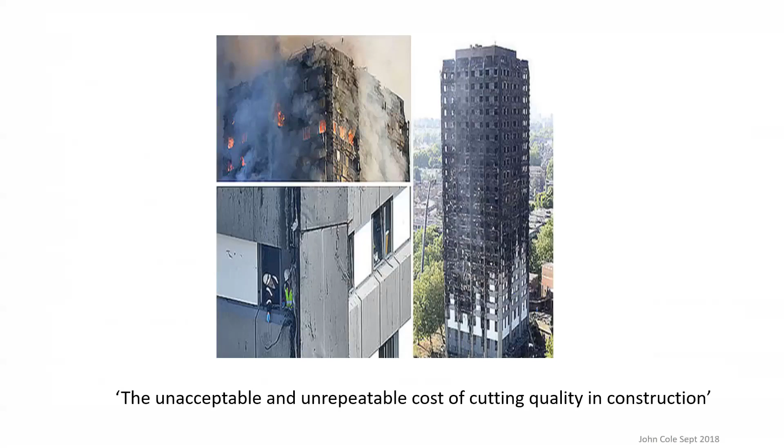This is the unacceptable and unrepeatable cost of cutting quality in construction. We cannot allow this to happen again. Alternatively, when we look at the examples I gave initially of the university buildings built in the last few centuries, the investment in the quality of design and construction endures and goes on giving. Thank you.

John, I'm not quite sure I've ever heard anyone speak so clearly into and diagnose such a drastic problem in our industry. You've given such clarity on the issues. It was a horror show at times watching those photographs, and already some people have written in asking, can they get a copy of that slide deck? There is a recording made of today's webinar, so you'll be able to access that following today's session.